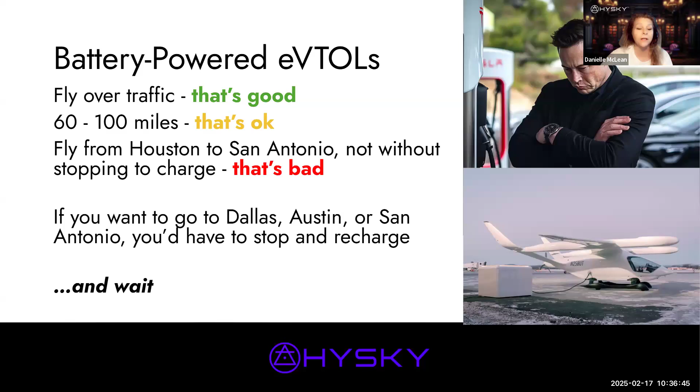We see Mr. Musk is just irritated waiting for the Beta aircraft to charge. No offense to Beta, I love the Beta aircraft and everything they're doing, they are working on some really cool charging technology. It just happened to be the only image I could find of an actual eVTOL being charged. So you're still gonna have to wait and recharge.

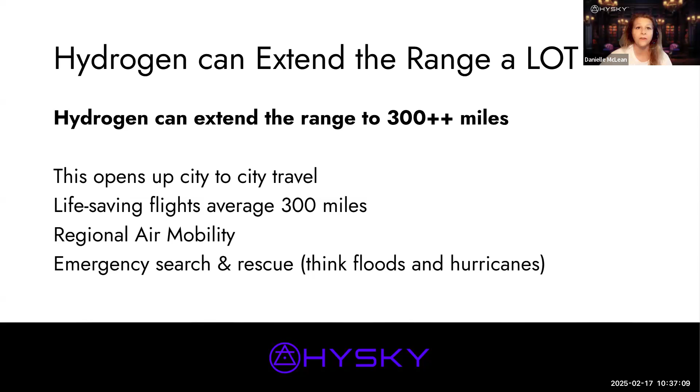So hydrogen can extend the range a lot, hydrogen can extend the range to well over 300 miles. This opens up city to city travel, life-saving flights which average about 300 miles, regional air mobility, and emergency search and rescue. For those of us Houstonians, you can think floods and hurricanes. There's a lot of opportunity for hydrogen.

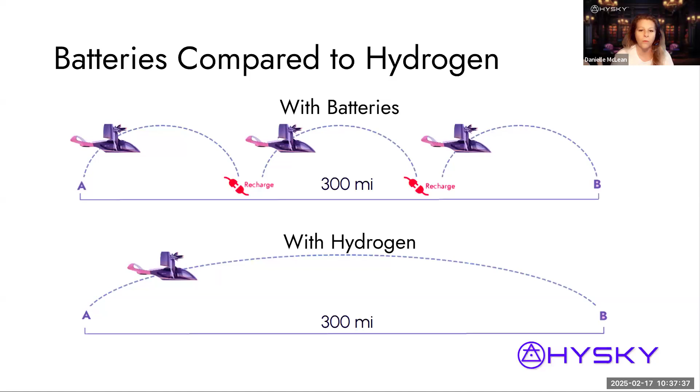This is an old slide, an oldie but goodie, but it really demonstrates, and this could be for fixed wing aircraft too, but this is for an eVTOL, from point A to point B, it's 300 miles. If you were doing that with just batteries, you're going to stop and recharge 2 times at least. If you were to do that same flight with hydrogen, you could go all the way there with that one fueling of hydrogen.

And yes, you may have seen in the news last week that Airbus is delaying their hydrogen program, but they're still very much focused on hydrogen, they're just doing SAF first.

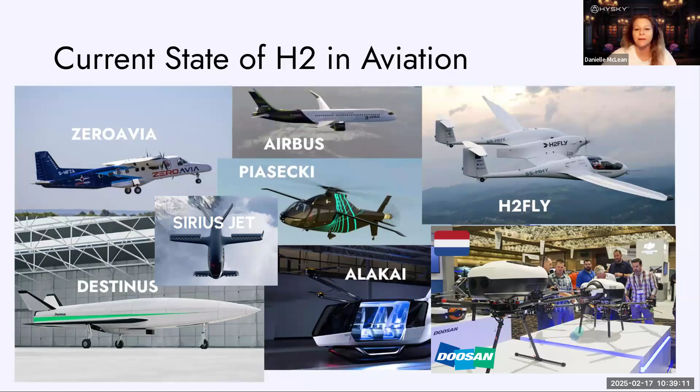That makes sense because we talk about SAF being kind of a precursor to hydrogen. So make no mistake, Airbus still knows hydrogen is the only way to zero carbon flight, but they're just delaying that project a little bit, about a decade. So they're still in the game.

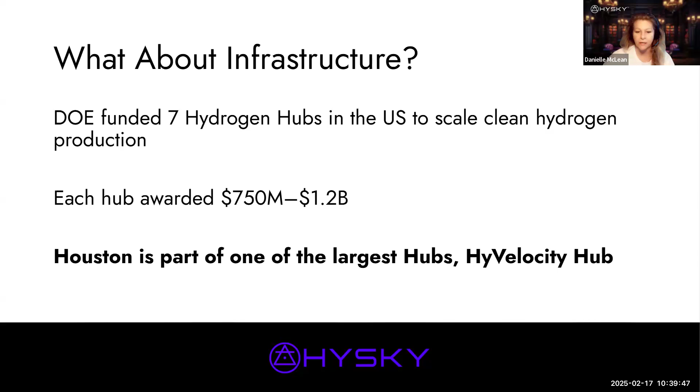Hopefully your next logical question is, what about infrastructure? Because that's exactly what HYSKY asked. Well, the Department of Energy funded 7 hydrogen hubs in the United States to scale clean hydrogen production. Each of those 7 hubs was awarded about $1 billion. Houston is part of one of those largest hubs, called the HyVelocity Hub. I'm bringing up Houston because HYSKY is based in Houston, but we're working with all of the hubs, and we're especially interested in the one here in Houston.

So if you hear somebody say the Houston Hub, the Gulf Coast Hub, or the HyVelocity Hub, they're talking about the same thing, and that goes for all of them. They all have nicknames. I don't know, us scientists, we love our acronyms, so it's just as much a thing in energy as it is in aviation. Each of these 7 hubs were awarded about $1 billion each, give or take.

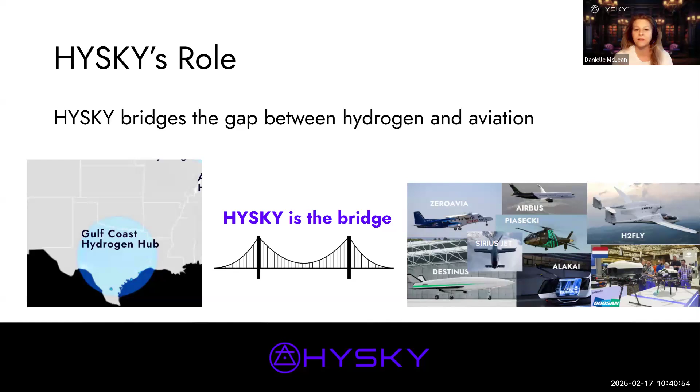So HYSKY's role in all of this is we bridge the gap between hydrogen and aviation. HYSKY is located in Houston, so we're very focused on this Gulf Coast hydrogen hub, but we bridge the gap between all of these companies that are developing hydrogen powered aircraft. That is our role. We are the bridge.

Another thing you can learn, if you're already an engineer, especially an aerospace engineer, is more about how you can design a hydrogen-powered eVTOL or a fixed-wing hydrogen aircraft, or advancing hydrogen at the airports, or hydrogen storage. This is for existing engineers, unless you're a very diligent and studious self-taught engineer. It's a very technical course that we partnered with AIAA on, 20 hours, 10 lectures. We did it live at the end of last year, but you can get the course on demand, so I will post that in the chat.

Oh, hi Angela, you're here and doing links, thank you so much. I love when I see that as a surprise.

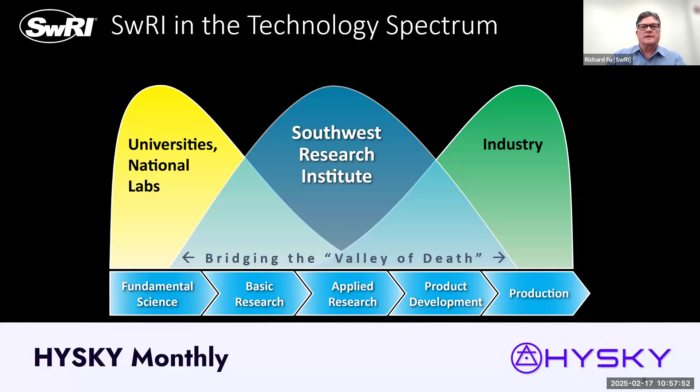Much like the way Danielle described HYSKY, that's kind of the way Southwest is set up. We bridge the gap between universities and industry. We do not make a product. We get involved with the basic research, and you can see the applied research and product development. We do pre-production work, but we turn it over to industry when you start to get into the production side of things. So we also bridge that gap, like Danielle was mentioning.

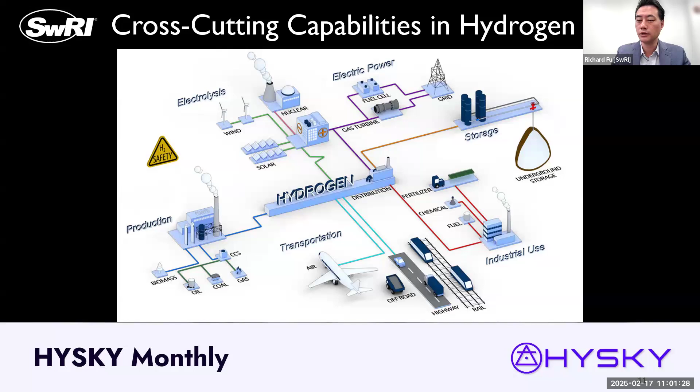So as you heard from Dennis, we have over 3,000 researchers and engineers working on wide-ranging facets of hydrogen energy, from production to end consumption. I cannot really cover it all in 30 minutes or so, but I would like to introduce a few select areas of our activities today.

So here's the list. The first is about our fuel cell R&D and testing services. Next, I will talk about our H2HD refuel consortium. Lastly, I will touch upon the safety standard tests. And if I do have time, I would like to touch upon the H2-ICE development also. Should you be interested in any other areas of our activities, please contact me or Dennis, and I'll be more than happy to send you the information.

Okay, so moving on to the fuel cell system testing experience and capabilities. SwRI has been working with hydrogen for several decades. Here I'm picking up some of the more recent activities in fuel cells since 2021 or so, and I'll be talking about some of these projects.

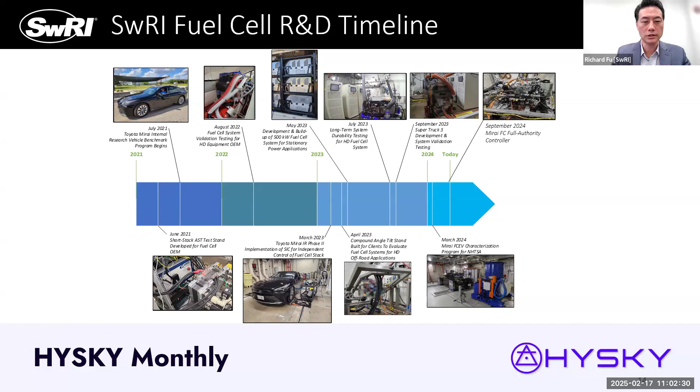The first one is about our internal research, which Dennis mentioned. It was a benchmarking and controller development research of the Toyota Mirai. In 2021, we began this test with a phase 1 research to understand the state-of-the-art FC vehicle at the time. It was the Gen 2 Mirai.

We hooked up a bunch of instruments to investigate how the stack performed on the various drive cycles, and to look at how the balance of plant, such as the compressor, HRP, and coolant pumps, supported the stack operation.

The findings from the benchmarking study were that the Mirai stack was very transient and provided more than 50% of the power. Stack performance dropped off and the vehicle derated at high load and high temperatures. The air bypass valve led to efficiency losses, so that was a potential for optimization. The controller was sensor-based rather than model-based, and humidity control was passive.

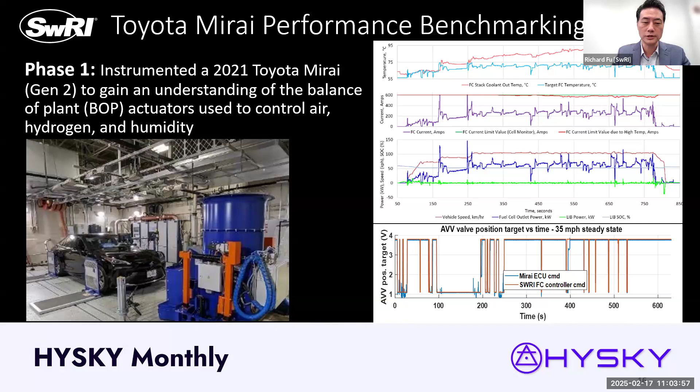So therefore, active model-based controls could improve stack performance. That's exactly what we did in phase 2. We built our own model-based controller and compared it with that of the original ECU output. We were able to demonstrate that our controller was within 7% of the Mirai's ECU and closely emulating it.

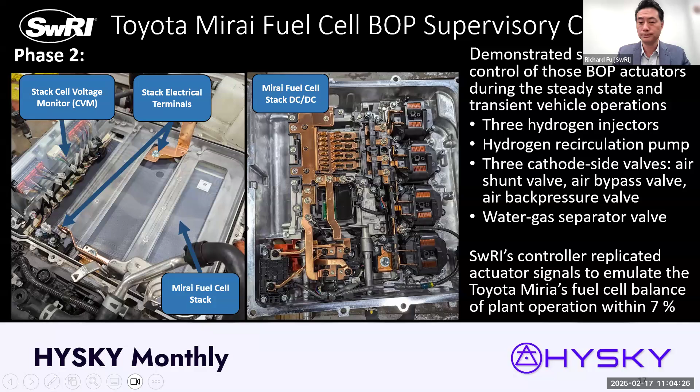And lastly, in phase 3, which is our ongoing research, we replace the ECU with our own full controller in place. We demonstrated that we can independently control the balance of plant from the vehicle itself. We are currently working on improving the efficiency of the vehicle.

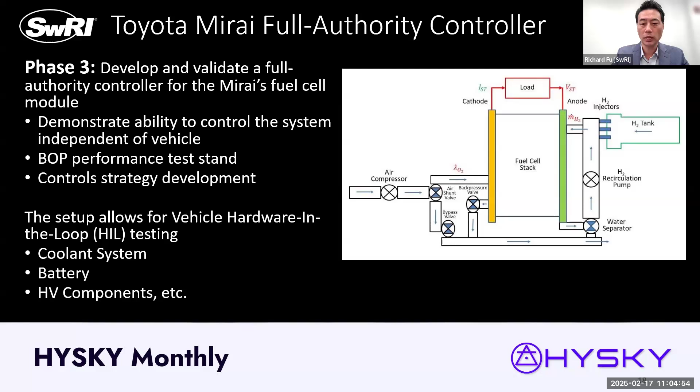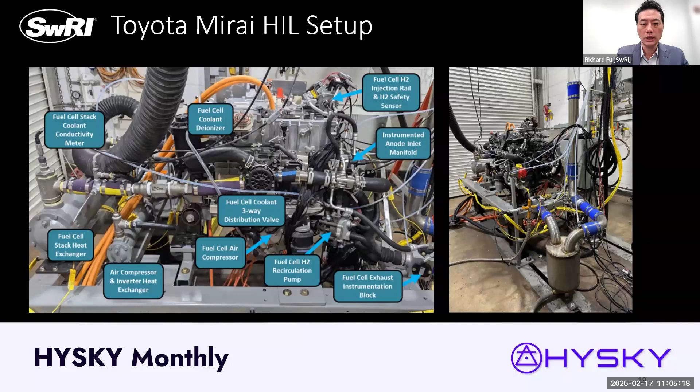And lastly, I'm showing you the actual setup of the test in our lab. With this, we can perform various hardware in the loop tests to evaluate different components such as compressors, heat exchangers, and so on. So should you have any component that you would like to test, we will be able to do so with this setup.

Next, I'd like to mention some of our fuel cell system testing capabilities that may be relevant to aviation and aerospace industries. The first one is thermal chamber testing to examine the effects of extreme environmental conditions, in this case temperatures, on the performance. The fuel cell system is blurred out to protect the client's design and information in the picture.

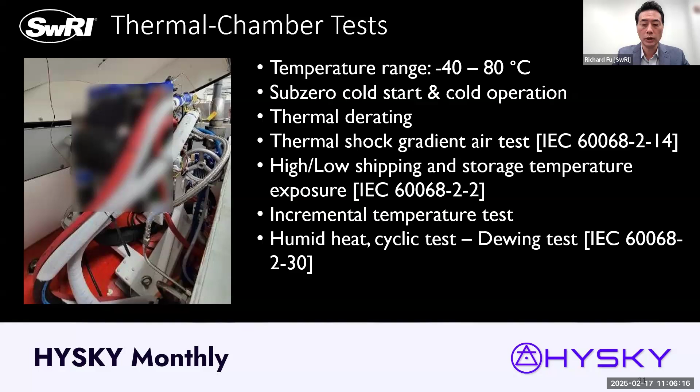With this setup, we can perform cold start tests or thermal soaking to simulate long-term storage conditions, as well as temperature stepping, temperature, humidity cycling, and so on. Another environmental test capability we would like to add is altitude testing, so please stay tuned for that.

The next test I am sharing with you is a compound angle tilted fuel cell system test. So can your stack perform when it is not upright? Will the FC be able to effectively avoid flooding when it's on its side, or will the compressor move enough air at an odd angle? These are some of the questions that this test can answer.

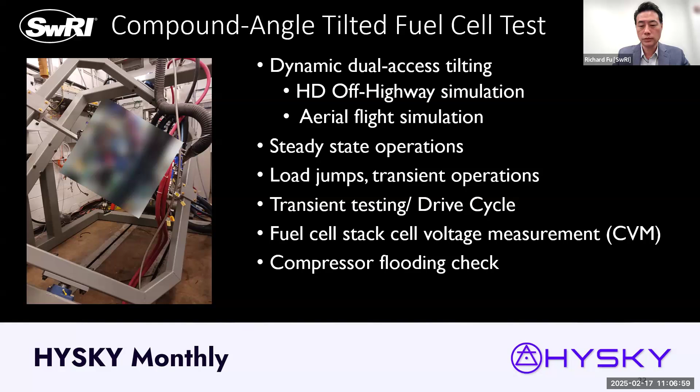The test was originally developed for off-highway vehicles, but I believe it is equally, or probably more, relevant for aviation fuel cell systems.

In life cycle or durability tests, we stress not only the fuel cell stacks but also the balance of plant to evaluate the system performance over time. In protecting your very expensive CapEx investment, you want to make sure the system will operate properly for thousands of hours under steady state and dynamic drive cycle conditions. We can examine the system performance for 2,000 or 3,000 hours, or whatever you define, and we will look at the performance degradation over this time to calculate the estimated end of life.

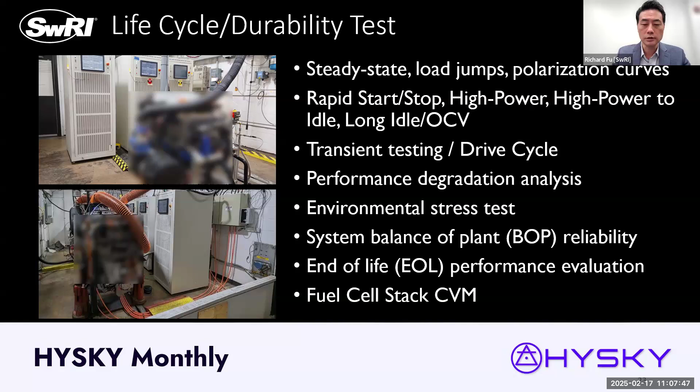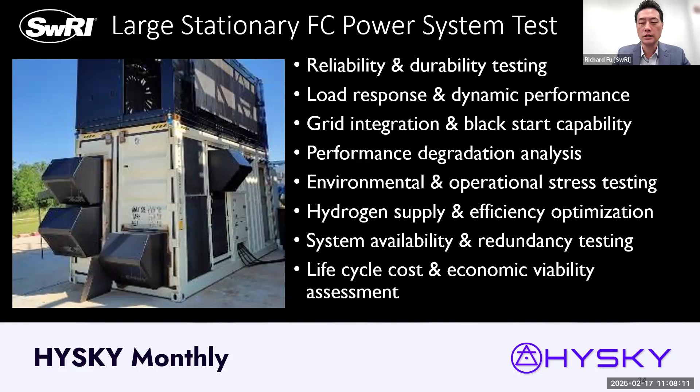And lastly, in addition to fuel cell for mobility, we can test large stationary fuel cell systems. The one pictured right here was a 500 kilowatt power generation system for data center backup. We assembled it for our customer, but we have the capacity to test up to several megawatts if needed.

And now transitioning into single cell level testing and short stack tests. Fuel cell MEAs, or membrane electrode assemblies, are at the heart of the fuel cell system. As you develop or test the MEA, it is important to really understand and know that it can withstand for tens of thousands of hours with accelerated stress tests.

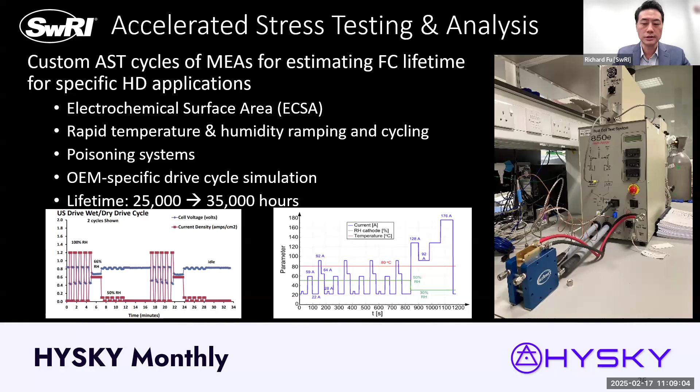We can perform these AST tests with load cycles, such as the ones defined by the Million Mile Fuel Cell Truck consortium, or customized temperature and humidity cycles. The setup can also be used for contamination tests if you're interested in running on reformed hydrogen sources as well.

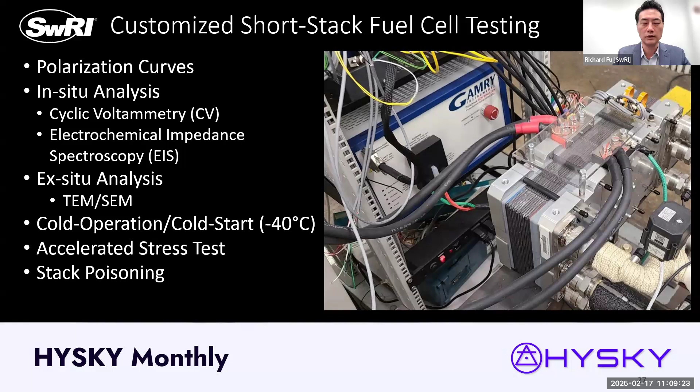And once a single cell performance checks out, we can perform in a short stack to validate multi-cell configurations. Again, we will be able to run various drive cycles and environmental conditions as you wish to prescribe.

Now I'd like to switch gears to talk about our material research and development effort into high temperature polymer electrolyte membranes. This is one of the topics we are considering for the upcoming fuel cell consortium, which is currently in the planning stage. I wanted to touch upon it because I feel it's important for the aviation fuel cell community as well. Up to now, I have talked about testing of low temperature PEM fuel cell systems.

But for fuel cell systems for heavy duty vehicles or aerial vehicles, we need systems in the several hundred kilowatt range. The consensus of many heavy duty OEMs, and likely also the aviation industry, is that there are a number of issues the fuel cell systems need to overcome before full commercialization is possible.

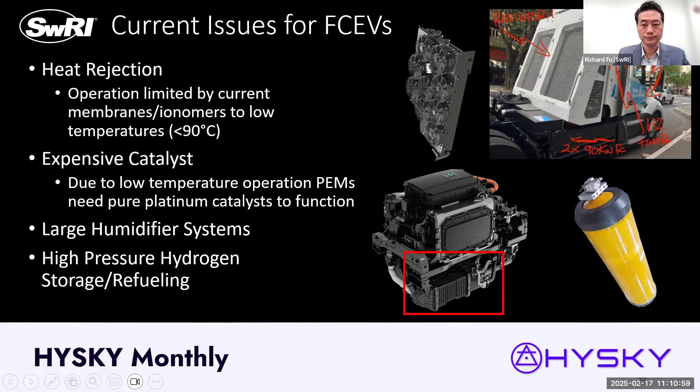A lot of the problems discussed today stem from the use of traditional perfluorosulfonic acid membranes like Nafion in PEM fuel cells. Nafion has chemical and structural limitations and can only operate up to about 90 degrees Celsius, and therefore it is called low temperature PEM.

Because it can only operate at low temperatures, it must rely on very expensive catalysts, such as platinum, to facilitate the oxygen reduction reaction. Even then, the activation overpotential is still high, and therefore the power density is limited.

And because it uses platinum, it is not tolerant of contaminants like carbon monoxide, so very pure hydrogen must be supplied. Because of the temperature limitation, waste heat rejection is difficult, and large and bulky radiators are required.

Nafion proton conductivity is heavily dependent on its water content. Because conductivity is affected by water uptake, it cannot operate under dry conditions, and therefore requires a humidifier and complex system to keep the membrane wet. And because the membrane uptakes water, it cannot operate or be stored below 0 degrees Celsius, so purging and antifreeze heating are required, making the system inefficient and even more complex.

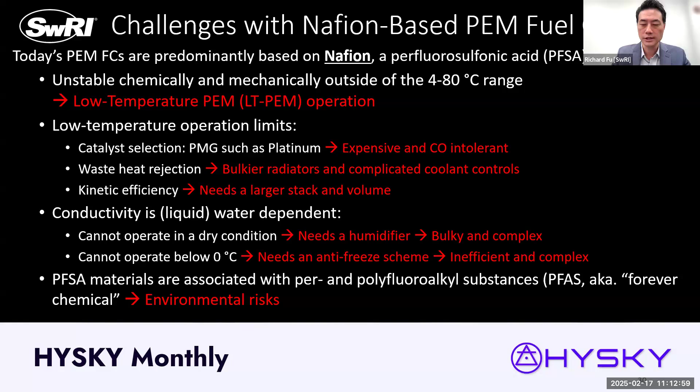So many of these issues can potentially be solved by transitioning to higher temperature PEM fuel cells. Many of the non-fluorinated membranes are easier to synthesize, so the cost can be lower. It operates at temperatures between 120 to 200 degrees Celsius, so the reactants are typically single phase, meaning you don't have flooding conditions that impede oxygen transport.

Because it operates at high temperature, it has the potential to use non-precious group metals that are less expensive and less susceptible to CO poisoning. Heat rejection is easier and requires smaller radiators and simpler balance of plant. The reaction kinetics are also more facile at high temperature, so higher power density is possible, at least in theory.

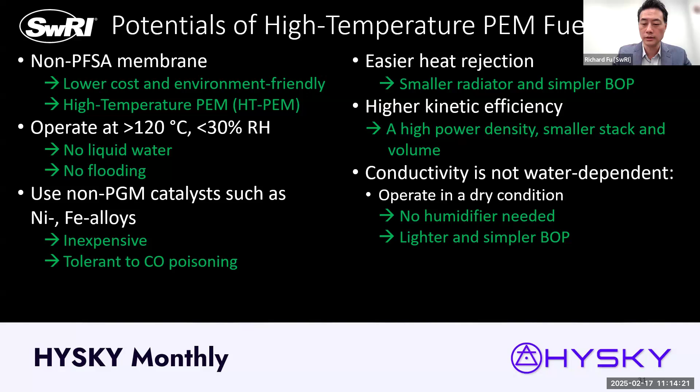And the stack can be smaller because the conductivity is not water dependent. It can operate in dry conditions, so no humidifier is needed, making the balance of plant lighter and simpler also. So even though I've listed all the potential benefits, the reality is not that simple.

HT-PEM still has many limitations today. Many of the current high temperature PEMs are polybenzimidazole-based membranes with phosphoric acid as the ion conductor. Therefore, proton conductivity is limited, and performance is still not on par with Nafion today. The phosphoric acid can gradually leach over time, leading to conductivity degradation and making the MEA short-lived.

In general, the phosphoric acid has low conductivity at low temperatures, below 21 degrees, due to a phase change, so cold start operation can be one of the challenges.

To solve these challenges of high temperature PEM, SwRI is jointly working on this issue with the University of Connecticut on a new material innovation, which we call an ordered metal organic framework composite membrane. While I'm not able to disclose too much about this today due to low TRL, it involves the fabrication and alignment of ionically conductive MOF in an ordered manner.

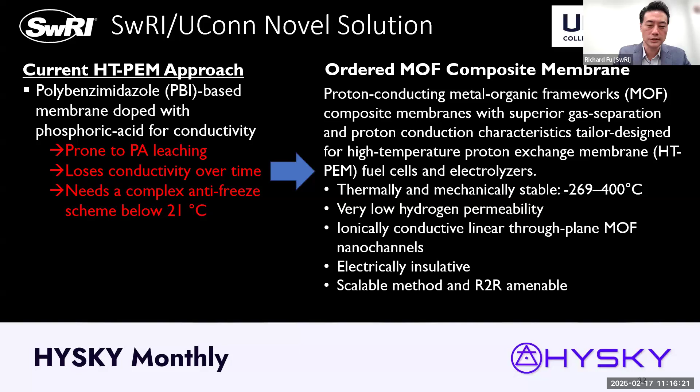And these are some of the characteristics requirements for the high temperature PEM, similar to what's set by the DOE. So we plan to fabricate the samples in the near future to validate its feasibility. While the material is still in development, it has attracted some interest, and we would like to build a consortium with this topic as one of the core programs.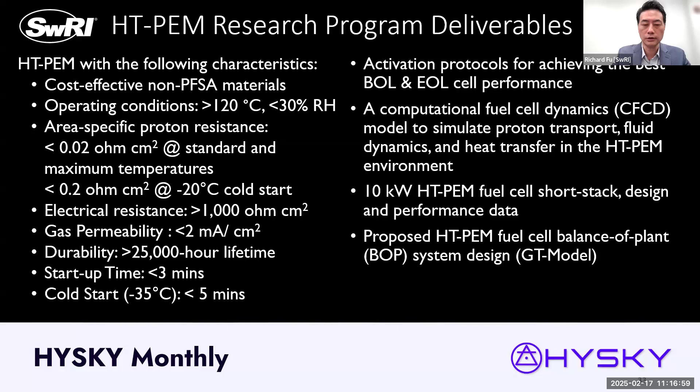So should you be interested, please reach out to me again, and I'll be happy to discuss more. So far, I have introduced you to some of the fuel cell R&D and testing services offered at SwRI.

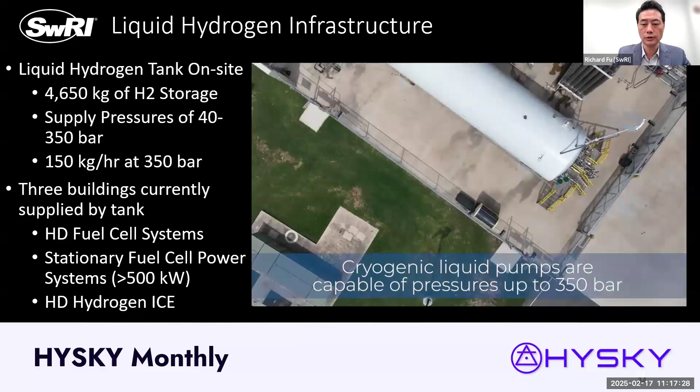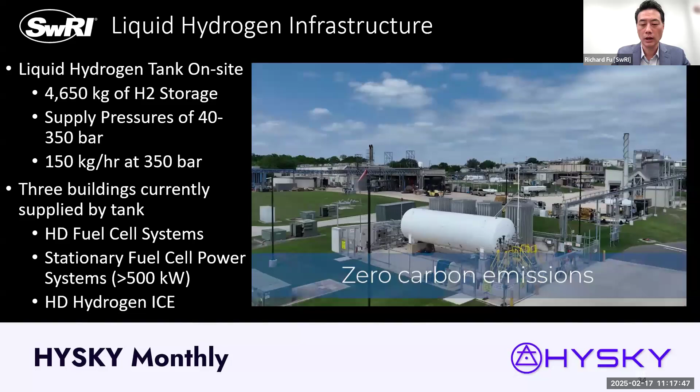The hydrogen is currently piped to 3 of our buildings and supporting hydrogen activities in 21 cells. While it was a much needed infrastructure to support the growth of the hydrogen testing activities, it was not without many challenges also. So we learned them really the hard way.

So that is a perfect segue to my second topic for this webinar. I would like to move on to H2HD Refuel Consortium. Whether hydrogen fuel cell trucks, hydrogen internal combustion engine trucks, or even airplanes, none of them would be possible without proper hydrogen infrastructure in place.

However, as of today, there are only a handful of stations in the US that are capable of filling at the rate of 300 grams per second, according to the J2601-5 standards. To my knowledge, First Element Fuel and Nikola have taken the initiatives to build the heavy duty refueling stations. But my information is limited to the US, though I believe the situations are similar in Europe or Asia.

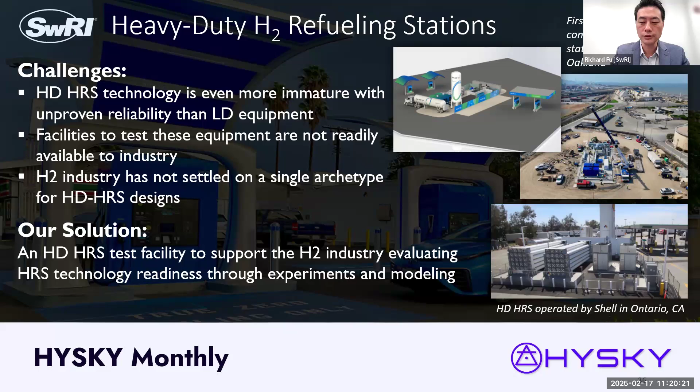Leveraging the liquid hydrogen facility that was already invested, SwRI is taking the initiative in bridging the gaps in the technologies with our latest consortium, which we call H2HD Refuel. It's a long acronym I'm not going to read right now, but the idea is the consortium is a 4-year program with the goal of collaboratively working on the primary technical issues of heavy-duty refueling stations identified and selected by the consortium members.

So once the research topics are defined, we will evaluate and pursue the research and test the performance of the equipment, and the findings will be disseminated to the members to benefit their future facility build out.

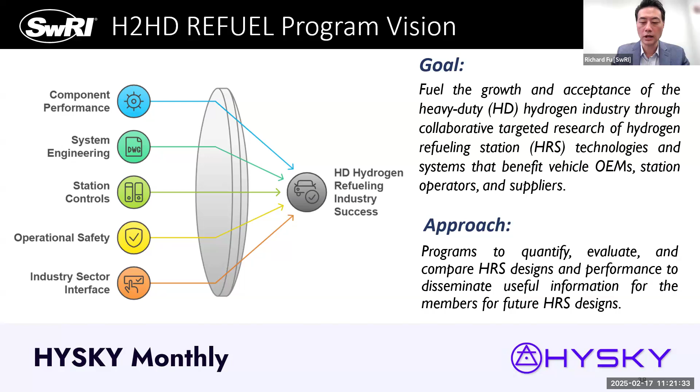So the consortium offers a safe and non-customer facing test facility to evaluate the pressing needs of and to advance the technology. As I said at the beginning of my talk, when it comes to hydrogen, our industry cannot afford to have accidents, and we should not gamble untested technologies with customers.

Here are some of the topics that we have preliminarily identified and are considering for the consortium. The program will be categorized into 3 broad groups: refueling equipment reliability, vehicle and HRS system integration, and safety and environmental. We will be looking into various flow components, including gas compressors, cryogenic pumps, storage systems, valves, flow meters, pre-coolers, and IR communication, dispensers, hoses, and breakaways, and so on.

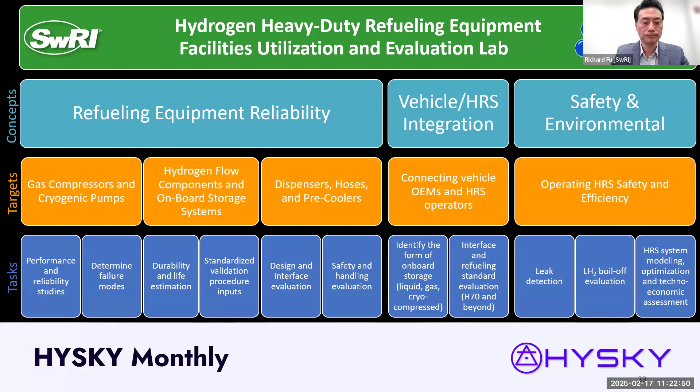The work can involve reliability evaluation, standards validation, fueling protocols, efficiency optimization, and safety evaluation. While the consortium was developed from the heavy-duty automotive perspective, many of the ideas, I believe, are directly applicable for the aviation industry as well. We welcome the opportunity to discuss and develop aviation-specific topics to be included in the consortium. Please reach out to me with your interests.

The last section of my talk is on hydrogen safety and standard tests. The Fire Technology department at SwRI is one of the world's largest organizations dedicated to fire safety research and testing. We offer multidisciplinary fire and explosion testing research services, including fire resistance material, flammability and explosivity testing, and standards tests.

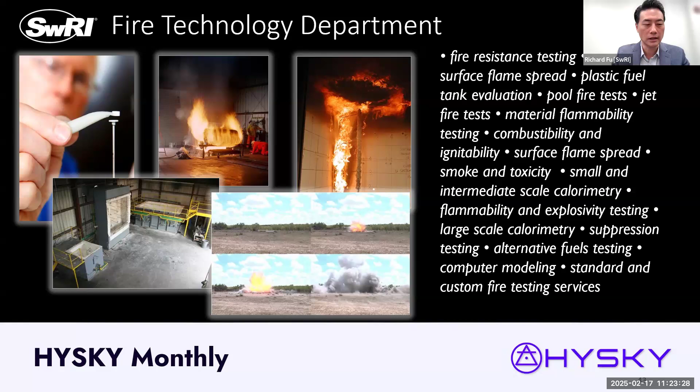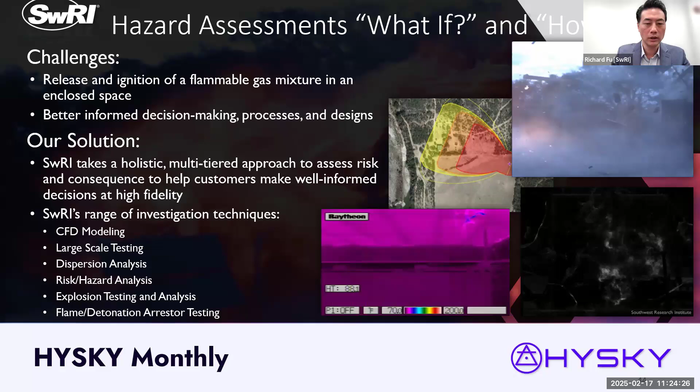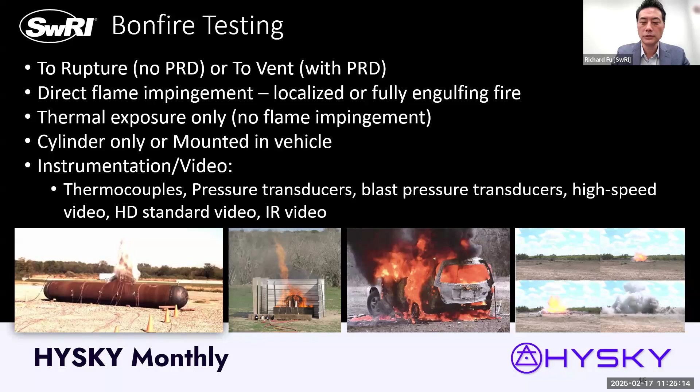Now, compliance testing. We perform multiple fuel tank tests and safety analyses each year, including compressed hydrogen storage systems. One test we can perform is bonfire testing with or without the PRD, flame impingement tests with cylinder only or mounted in a vehicle, in compliance with GTR 13. FMVSS 307 and 308 for heavy duty vehicles were just recently published last month, so we are working on updating our tests to accommodate those requirements.

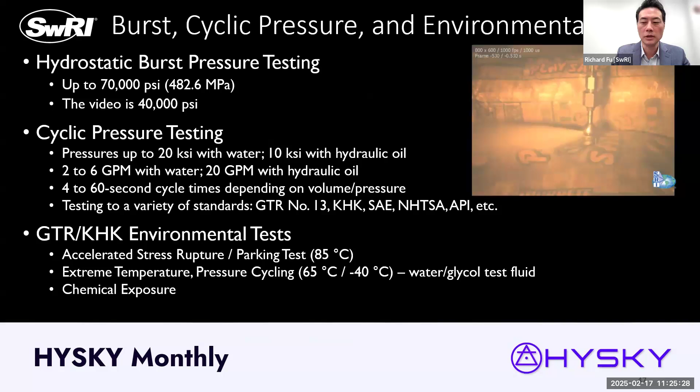We routinely perform burst tests, cyclic pressure tests, and environmental tests of storage tanks. For ballistic tests, at SwRI we can do either indoors or outdoors to perform gunfire tests with various calibers. I recently got a chance to witness this on a Type 4 cylinder, and it was really interesting to see how easily the bullet can penetrate through the tank wall.

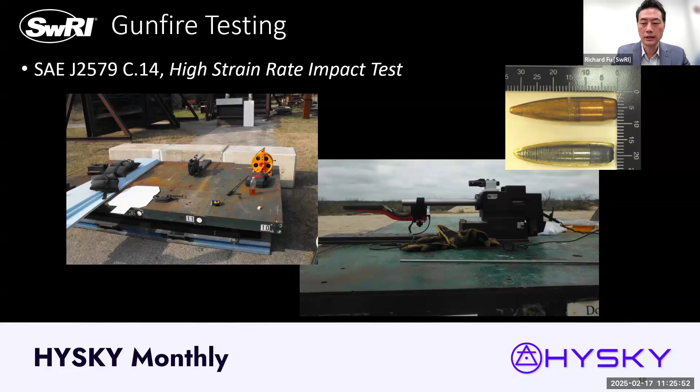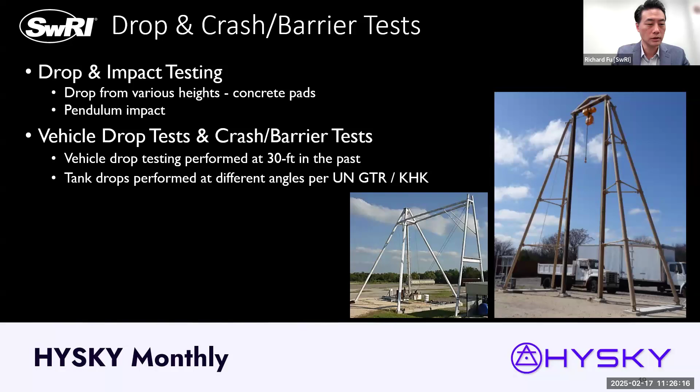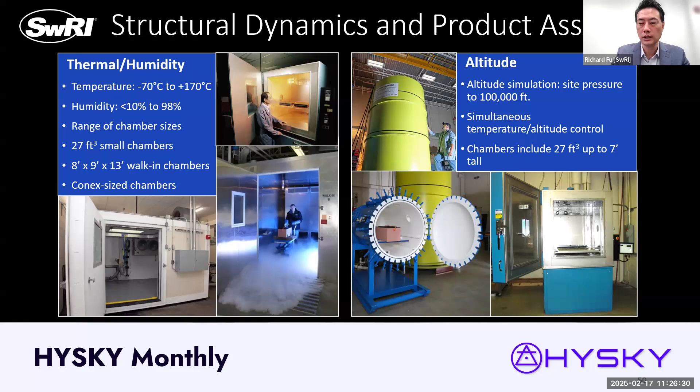Our mechanical engineering department can run drop tests from 30 feet, or there is a pendulum swing test as well. The drop test might be of particular interest for some of you in the audience as you develop your drones or aerial vehicles. Lastly, our structural dynamics testing and evaluation offers product assurance with thermal and humidity cycling, altitude testing up to 100,000 feet, and shock and vibration, impact, and other tests.

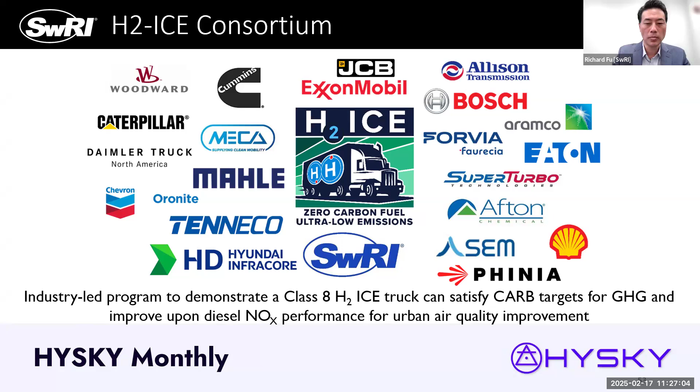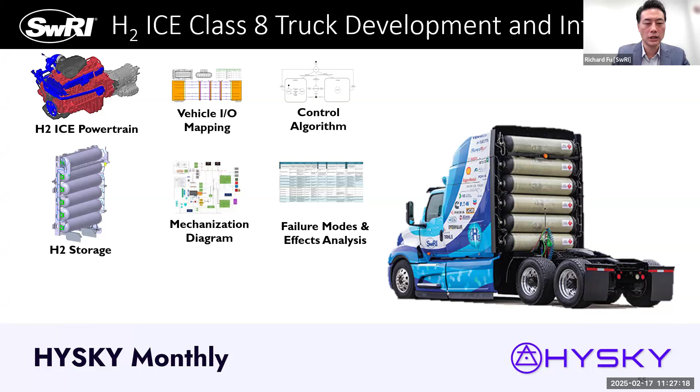That concludes the test section, but if I may, I'd like to briefly touch upon one more thing, the H2ICE consortium. This was one of the very recent consortiums that we concluded, and now we are moving on to the second phase, the H2ICE 2 consortium. I won't go into details, but we modified the Cummins CNG truck engine into hydrogen and integrated it into this truck. Here is our product that we exhibited at the expo recently, and you can see the program manager, Ryan Williams, talking in this video.

Fantastic presentation, I could have listened to that all day. Also, being part of the blowing up of things looks like a really fun job. Thank you for that presentation.

It was very informative, I'll start with the first question. I asked it in the chat, and you kind of answered it by saying you welcome people from the aviation industry to be part of the consortium. My question is, it's sort of a comment and a question. As I understand, the Toyota Mirai uses hydrogen stored at like 700 bar in gaseous form. For heavy duty trucking, are they looking at using liquid hydrogen? And I'm wondering if aviation should be its own consortium, or if you think it fits into the heavy duty one, simply because in aviation we have to deal with the FAA and we may have to be under stricter regulation than automotive. What are your thoughts on that?